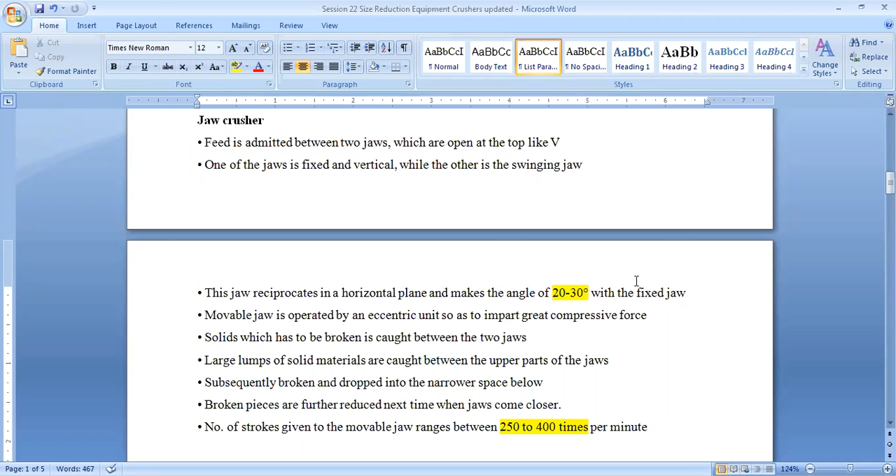Today's topic is the size reduction equipments. First, we will discuss the equipment which works on the compressive force, and these are the crushers. There are two types of crushers which are popular: one is the jaw crusher, and another is the gyratory crusher. Both crushers work on compressive forces. Let us first discuss the jaw crushers.

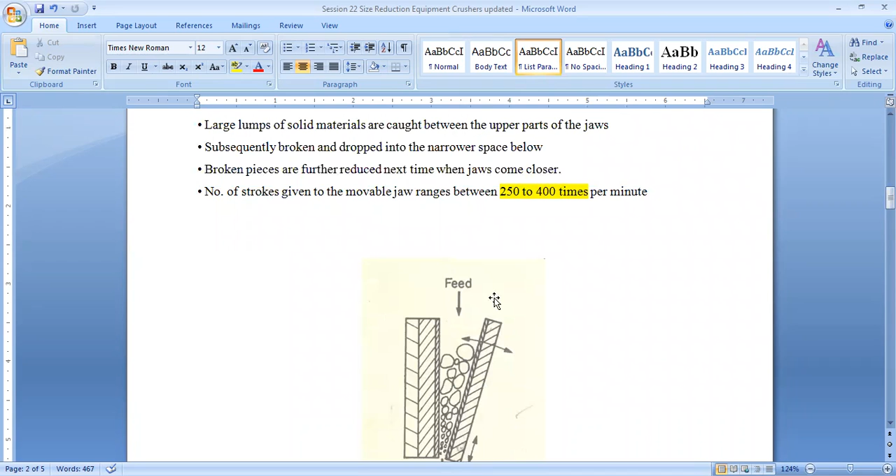In a jaw crusher, there is one stationary jaw and another movable jaw. This movable jaw moves in a reciprocating manner in a horizontal plane, and I have attached a live animation video to my material, which you can check also. So this is moving in a horizontal plane in a reciprocating manner, and this is fixed.

When you feed from the top, the feed gets compressed by the movement of these two and gets reduced in size. It comes back again here, and that's how the size is reduced up to a size where this opening is really narrow, and the size of this opening goes further, and that's how the size is reduced.

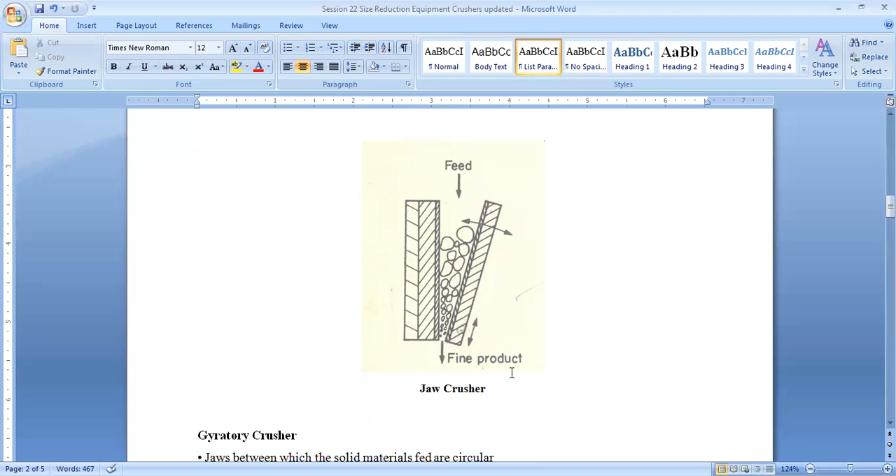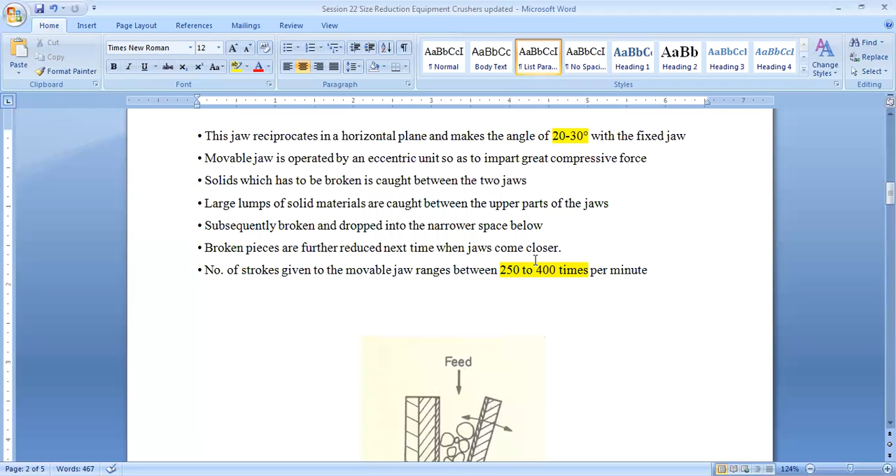So that's how this jaw crusher works, and this angle is important; it depends on the type of material we are using, and normally this angle is 20 to 30 degrees with the fixed jaw. The movable jaw makes an angle in the 20 to 30 degree range with the fixed jaw.

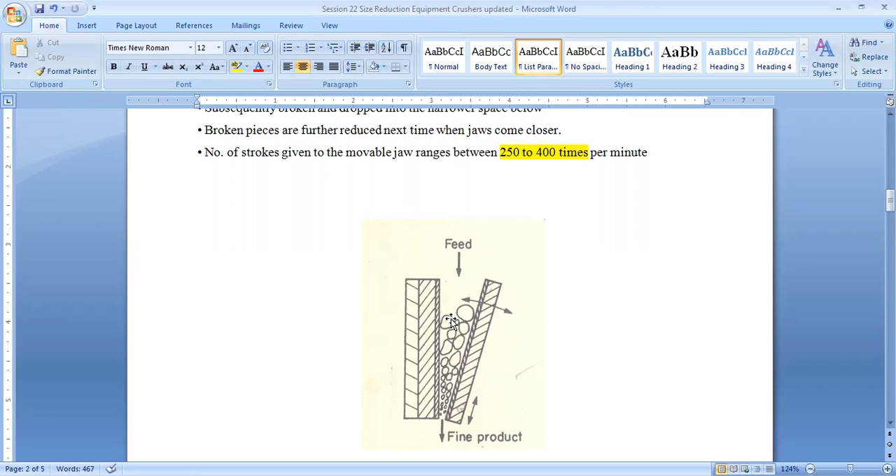Now the question comes, how many times does this moving jaw reciprocate? The number of strokes given in a minute is somewhere 250 to 400 times per minute, and that's how we get the fine product. So that's how this jaw crusher works: compressive forces are implemented, and the product breaks into smaller pieces. Similarly comes the gyratory crusher.

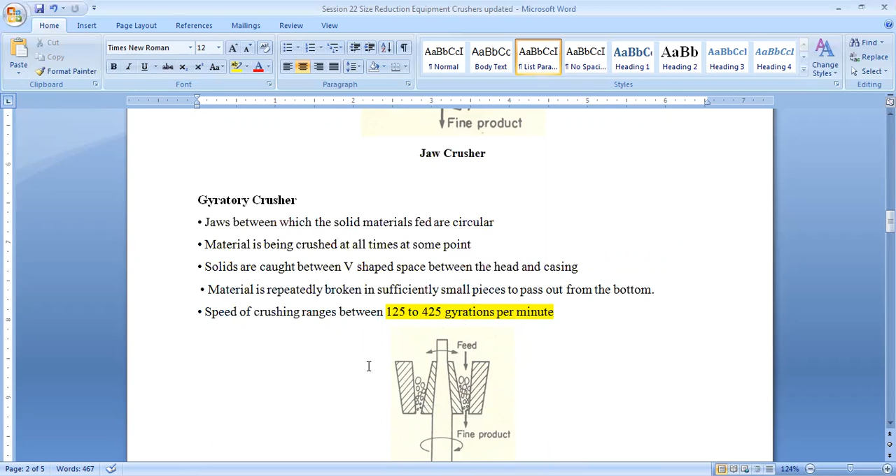The gyratory crusher acts on a gyrating motion. What is happening in this gyratory crusher? There is a gyratory main shaft, and that main shaft gyrates in a stationary shaft, which we also call the liners or concave, and the material fed into this V-shaped area also comes under compressive forces and gets crushed.

You can also see an animation of this in my recommended video, and that's how the material is repeatedly broken into smaller pieces. And for how long? Till it can pass through this narrow opening, as I was telling in the jaw crusher. So that will be the size of these products. And how many times does it gyrate? It gyrates 125 to 425 gyrations per minute.

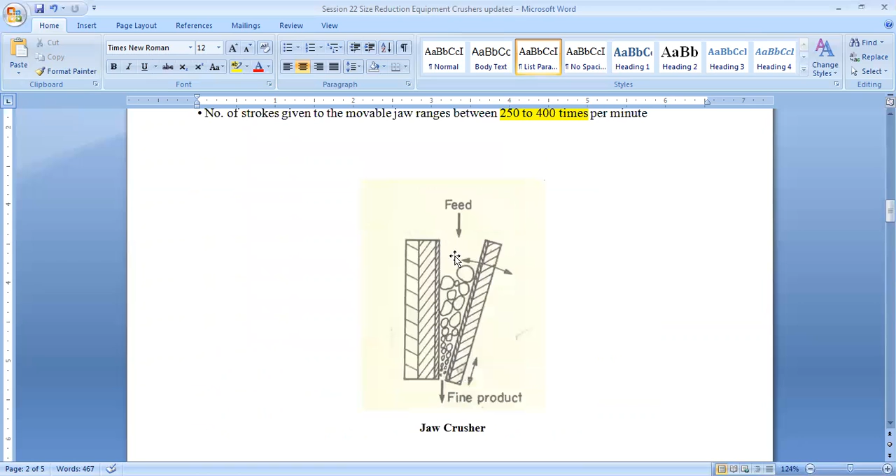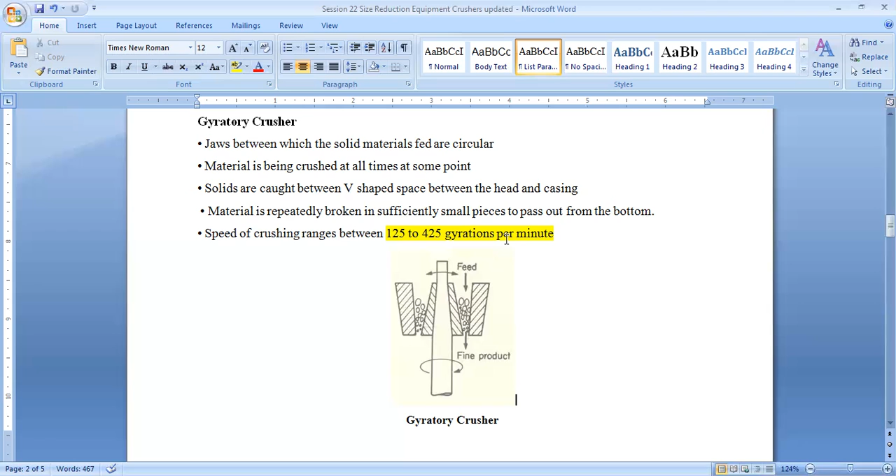So that's how this gyratory crusher acts, and it all happens in a housing. As I told, that housing has two parts: one gyratory main shaft, and another stationary shaft, which is known as the liner. Here also the product is kept in the V shape, compressive forces are implemented on this product, and that's how the product is crushed into finer particles. So that was about the gyratory crusher as well as the jaw crusher.

Now, what is the crushing efficiency? The ratio of surface energy created by crushing to the energy absorbed by the solid is known as crushing efficiency. If the solid is absorbing a huge amount of energy, but new surfaces are not being produced as much compared to the energy absorbed, then we say the crushing efficiency is not good.

But if enough new surfaces are being created, meaning the larger particle is reducing into smaller particles of the desired shape and size, then I will say it is a good crushing efficiency. So it is the ratio of surface energy created by crushing to the energy absorbed by the solid.

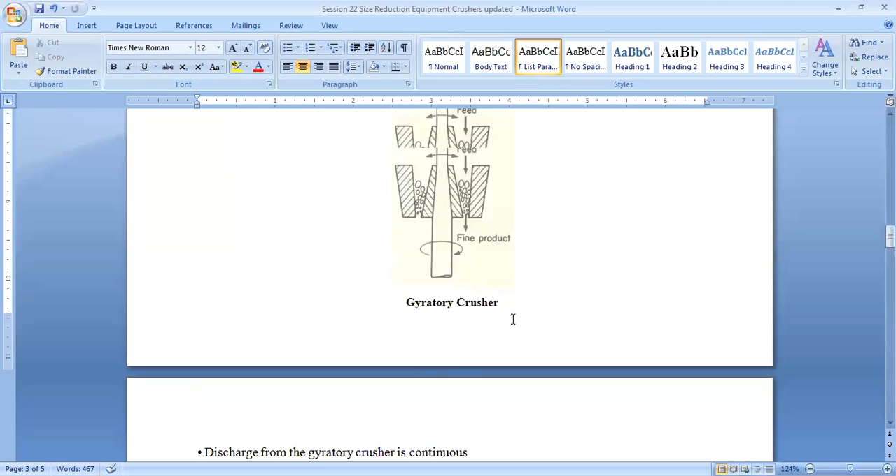So that's all about this gyratory crusher and jaw crusher. They are pretty simple if you understand them, and if you don't, it takes a little while to understand these jaw and gyratory crushers. So that was it about my talk on crushing equipments.